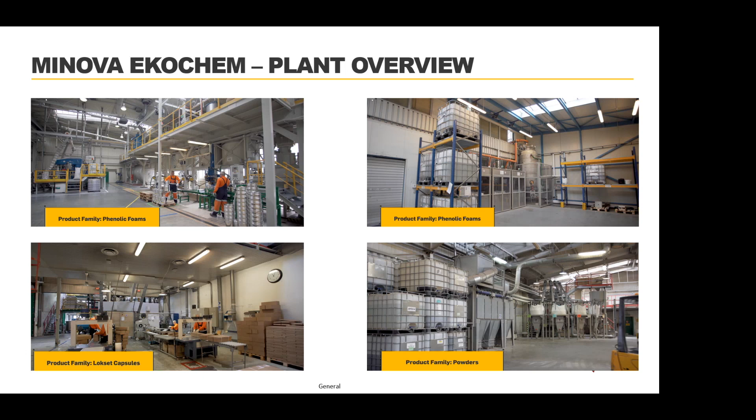Yeah, just another picture of the production plant there.

I'm not too sure where everyone is based. Are we all based in the southwest? West, are we? Yeah, and south, maybe Wales as well.

So Minova for the UK is based in Barnsley, where Jamie's from, and Nick's from that kind of area. I'm actually right down in Portsmouth, so I don't very often go to Barnsley, to be honest. But my job is to promote the sales. I do maybe go there 5-6 times a year, but I don't need to, because a lot of my work is all over the country anyway.

So we've got a brand new facility here, a really good facility, just off the M1. What junction? 36. Yeah. So it's very easy for any customers who want to visit site, or any customers that want to collect product, because you can collect it yourself, and also for our deliveries as well. It's good access.

There's no actual resin in that picture, but as well as keeping the resin in the warehouse, we also keep all the geotechnical products such as soil nails, micropiles. Again, we'll come on to that in just a few minutes.

Okay, this is really just a little history of how long we've been making things. So resin cartridges, which we use for rock bolting, we've been making those since about 1965. These are used to, has anyone used these at all? You've used those, great, okay. So you know how they operate. They're used often to put in either bolts in mining, or maybe soil nails on embankments for maybe motorways or rail embankments.

And then in 1971, we've been heavily involved in injection resins in Poland, and then quite recently, 2003, we've got more involved in the silicate resins as well. So there's a slide in a minute which explains what the different resins do and what they can be used for.

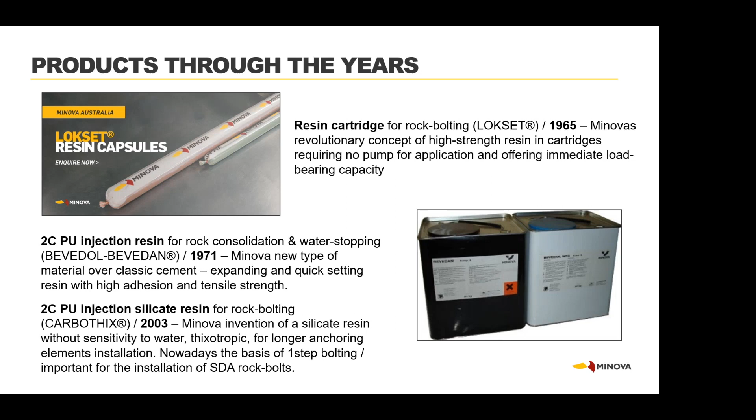When you say roads, is that with paving? Yeah, with concrete roads, the concrete slabs. I've got a case study which I'll show you in a minute. But yes, the resin can be used to actually stabilise the concrete slabs on motorways. You can also work on flexible tarmac roads as well. It's done differently and then you have to resurface afterwards generally. But yeah, I've got some case studies so we can show you details on that afterwards.

So the range of resins we manufacture: silicates, polyurethane injection resins, gels, cements and phenolics, and also the product we call Lokset. And on the next slide, if you went onto our website, which would be nice if any of you get a chance to do this, you'll see there's the whole range of resins on there, probably well over 100 different resins. But we try and keep in the UK market down to about 20 or so, since there's not too many out there, and some are very similar.

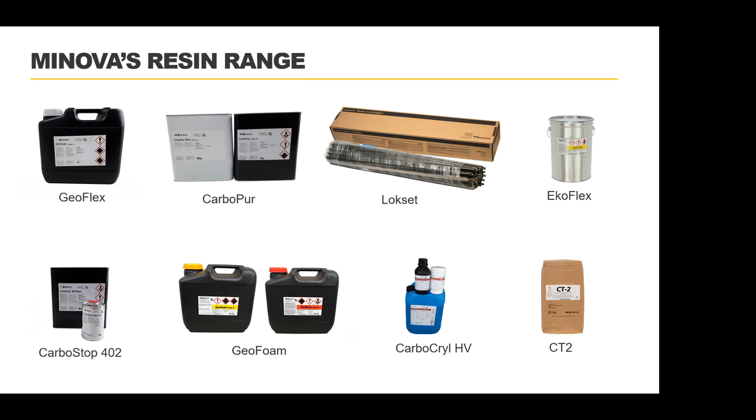After the presentation, we've got all the TDSs and data sheets on these, so we can discuss any of these for you.

Just a few shots of things we'd always be interested in getting involved in. Some of these are probably a bit too extreme, but certainly things like sinkholes - we can get involved in these, and we've got products that we can work with the contractor to actually fill the sinkholes.

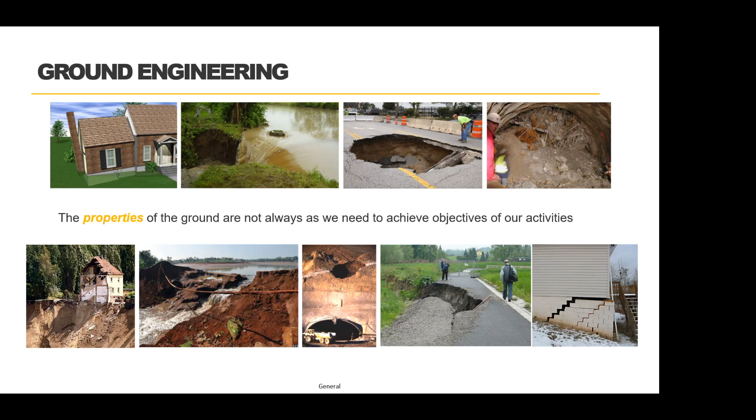For ground stabilisation, people like Mainmark will speak to you about this later, but when you've got cracks in walls, you can do an injection pattern around the outside of the property, inject to a certain depth depending on the ground reports, and the idea is to close the crack up and lift up. You're offering a guarantee normally, David, on your ones? Yeah, David will talk about that in more detail as a contractor in a minute.

This is a sprayable membrane that we use to stop - it's used really to stop rockfall, and anything loose being completely sealed in there. We're using quite a lot on a mine in Whitby.

What's that new one? Potash. Potash mine. We're using quite a lot of this there at the moment. Am I just pressing this? Sorry, Jamie. Oh, sorry.

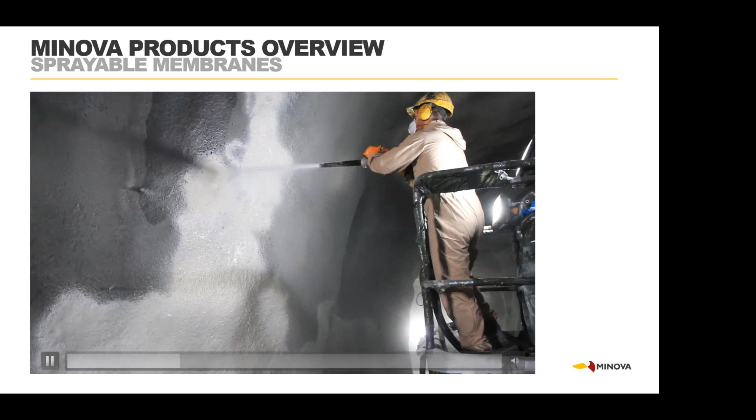Yeah, so potash mine - I don't know if you've heard of that. That's the one going from Whitby right across up to Teesside, which is where this is being used at the moment, and it was specified by the mining teams there because it's used a lot by Minova in America, so we're quite pleased to get that into the scheme. As you can see, it's a nice fast process.

You can cover large areas in a short space of time. By this slide, this product here is a resin - this is done under test conditions, but it'll give you an idea what happens when you do the same work on a concrete slab on a road or even in a warehouse, if there's water contained underneath the ground. This particular resin doesn't react at all with the water. So as it's pumped in...

As you can see, the resin's being pumped in, and what it's doing is migrating in and actually pushing the water out. So if this was on, for example, a motorway under a concrete slab, we'd have very small holes drilled into the ground. The resin would go in, the water would come out of the spare holes, so we'd know the water had been all pushed out, and then the remaining resin would set underneath the road, knowing it was water free. So you then get a steady, stable slab.

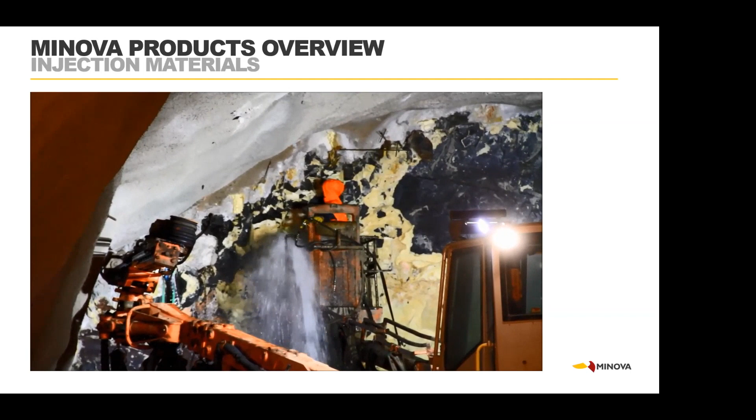Okay, so it looks like someone's just turned that off, but that's the process of constantly pumping the resin there and reacting with the water. It could be a long process. Any idea how long that would be, Nick? That one's a couple of hours, pumping in the same place.

This was a big project, but it can be used quite easily where you've got, as I said earlier, basement problems, sinkhole problems, lift shafts, things like that, where you've got water problems.

One of the main projects we've got done recently was the M180, a concrete road. It's one of the main roads between Hull and Scunthorpe. This was directly for National Highways.

This is one of the longest stretches of concrete road that's been injected with resin over the years. The beauty of using resin within road maintenance is what they call life extension work. This road hadn't had any repairs or any major works done on it for about 30 years. So there were two options: either take up the slabs and replace them, or come up with an alternative method. So here resin was injected.

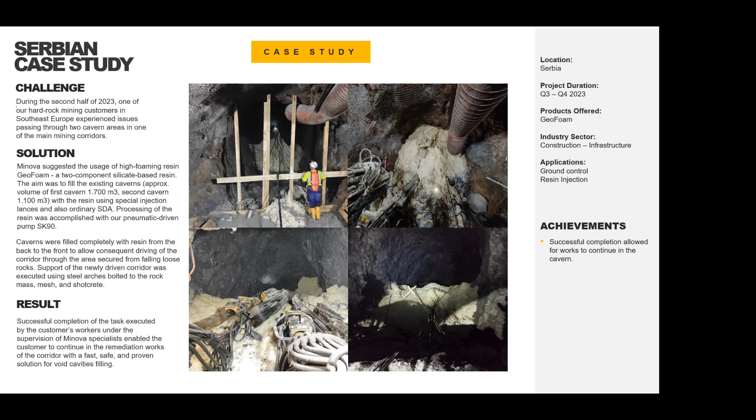Is there a strength to that? There is a strength, but there isn't - there's minimal strength, to be honest, and it depends on how we can change the strength depending on the actual foaming factor. But the idea of this, we've certainly got resins which have got lots of strength. If you need a particular strength, you tell us what you want, and we can find the resin. But this particular one is purely mainly for void filling, where you don't need strength.

What benefit does that bring then? What is the idea in the void being filled? Well, there was rock - I wasn't actually involved in the project, but from what I understand, the major project problem was there was constant rock falling, which was affecting things. I mean, they were filling out that void, but obviously they weren't using that void afterwards. So yeah, there is a question there about what they were doing for the long term.

But initially they needed it filled because of the amount of rock falling. So I would need to find out a bit more about it for you, which I can do.

It's probably easier with that method, because it expands as well. Yeah, that's right. It was a big, very large project. That gives you an idea of the height there, and that's being filled with a resin.

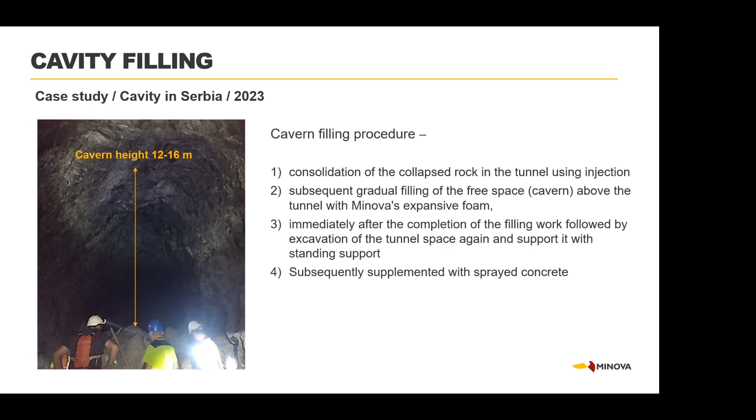It's quite unique actually. Reading your thing there, you've excavated through with this material - you can then excavate through it to put a personnel tunnel or something through, after they've done the actual work. It's because it's brittle at the end of the day. It's not like - I can show you resins, we've got samples in our cars that are solid, rock hard. But this would just be crumbly, so yeah, you can excavate through it.

Is it environmentally inert once it's cured? Does it give off anything? Is there runoff? No, it is inert once it's all cured. All of our products have got full data sheets. There's only one product, used years ago in the mining industry, which we don't really use in this country, and certainly wouldn't use within the construction industry, but everything else can be dug up if necessary. We've got all the safety data as well, which we can provide you. But the idea of that slide really was just to show you the mass volume of product.

Nick's used this on the shafts, haven't you? So for the shafts, yeah, I think from memory you did about 60 cubic meters recently. Well, the 18 meter one - 18 meters depth, 3 meters wide, 4 hours to build. So you can see how quick it is.

And is that done with two part mixers? Yeah, it's two part. Each mix - when it reacts, as soon as it's mixed, it reacts. How do you place that, with a pump or some type of injection pump? The geofoam into the shafts? Yeah, it comes down two separate hoses and then mixes on reception. Pressure holes, is it? Pressure, yeah, pressure.

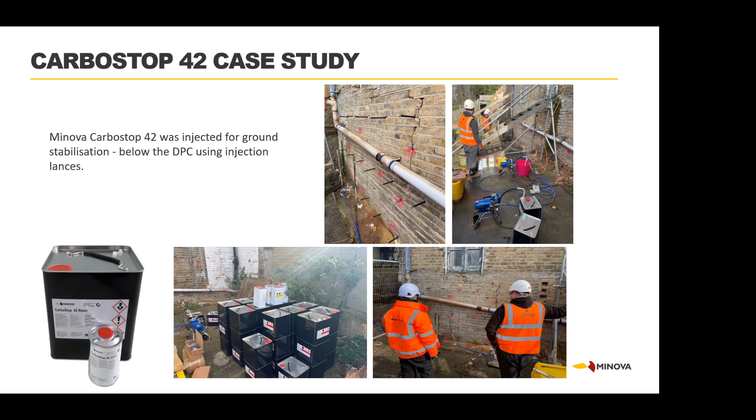I'm getting close to the end of the presentation now, but I'm just briefly going to touch on the geotechnical part of Minova. Like I said earlier, it's not part of the company I'm involved in, but I'm just going to show you a few slides of things that you may be interested in. If you are, then I can get our geotechnical manager to make contact with you.

We get involved in projects such as mesh walls. Some of the products are manufactured, but what we do also as a company, we're known as a one-stop shop. So contractors like Bam Ritchie's and Keller will buy all the products they need off us rather than going around to lots of different companies. So mesh, nails, etc.

Lokset resins, these are held in stock in our Barnsley head office warehouse. These can be quite easily taken out to site, either in large volumes or in small amounts.

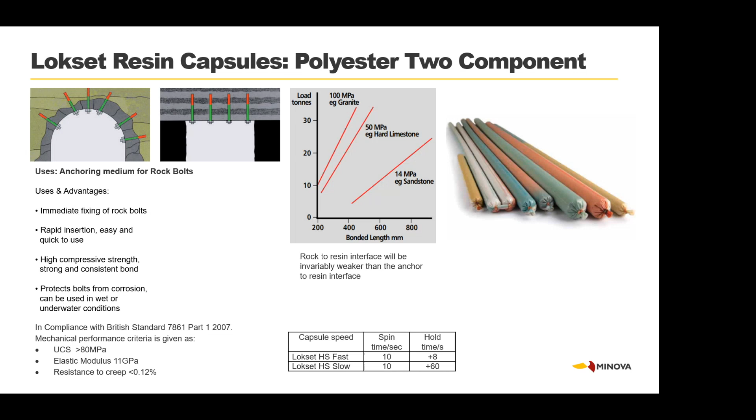I did actually go to this job briefly with our geotechnical manager, and this was a project where we'd supplied down near Hastings. We'd supplied all the actual mesh, all the nails, but not the labour. This was a Bam Ritchie site.

Again, more of the same netting, bolts. But you can see the kind of large projects that we certainly get involved with. And again, there's full technical support on this. There's also design as well - there's a team that helps with the design of these schemes.

Do you provide that design? Within Minova, there's some of the design. Yeah, we either do the design or we will put you in contact with our designers.

This is, I think, nearly my final slide. So we've been involved in some sections of HS2, as you can see there on the Chiltern Tunnel. This was all supplied, all the actual nails, all the mesh was supplied by Minova on this section. We were involved with Euston as well, but that stopped at the moment. But certainly a lot of money was spent on that, buying bits and pieces. We're still looking at a service tunnel at Northolt at the moment for HS2 as well. So we're still involved, even though the scheme's changing.

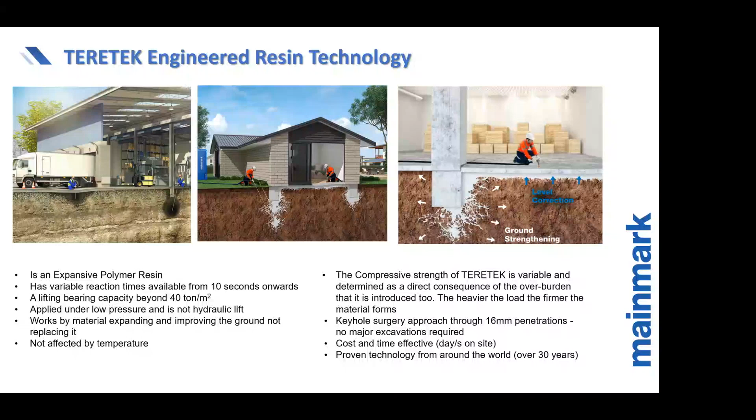Do you do the GI? We don't have in-house capability for that, but we can sub it out. A lot of jobs it's already done for us and we're provided with it. More applicable to the residential sector, we do 10-year insurance-backed guarantees and certificates of structural adequacy, signing off the job so a new purchaser of the property could get a mortgage and insurance.

So what do we actually use Teretek for? First, stabilisation and re-levelling, generally for ground-bearing concrete slabs. This could be a residential slab in a property, a vast area of concrete slab in a warehouse, or a concrete slab on an A road or taxiway in an airport.

We then have ground improvement, where we're injecting resin at depth underneath an existing foundation. This could be to remediate subsidence or for refurbishment works facilitating a load increase. We improve the ground to take the load.

We can also use these resins for void filling. We've got our Terefil product, which is foam concrete, and we've also got access to Minova products if needed. It depends on the nature and size of the void, and economies of scale, as to which is best in terms of pricing. But yes, we can do void filling as well.

Just to give an example of what it looks like when we mobilise a site - what do we actually turn up in? This is one of our rigs, a 10-ton rig, a self-contained vehicle. All the material, plant and equipment is contained within that, and effectively we just need to get this within about 75 metres of where we're working.

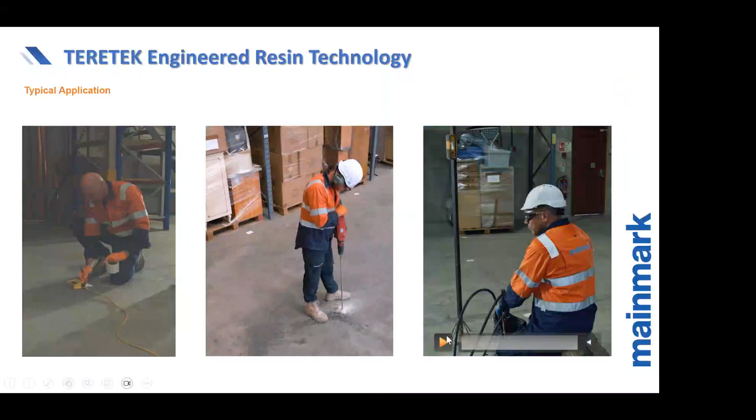I'll run you through how we deliver slab stabilisation and re-levelling. This example is a ground-bearing floor slab in a warehouse, a job done a couple of years ago up in Burnley. It's a commercial warehouse and the floor slab has dropped. There's racking off the floor slab, and where the slab's dropped the racking's uneven, so if you imagine forklifts trying to pick pallets off, it's a bit of a problem.

The traditional solution would be reconstruction, a new piled slab, something like that, but that's vastly intrusive, going to take a long time, and expensive as well. So this is really where the benefit of the resin injection system comes in.

The reason the floor slab dropped is the poor ground underlying the slab. It's consolidated, which has allowed a void to form underneath, so the slab isn't adequately supported and has therefore dropped.

Effectively what we do is take a level survey - on some projects this might be provided to us, but we'll come out and do it. We take a datum point and establish all the levels across the entire area relative to that datum, working out the required amount of lift. If we know precisely how much the slab has dropped, we very accurately know how much resin is required to undertake a certain amount of lift, which enables us to provide a fairly fixed quote.

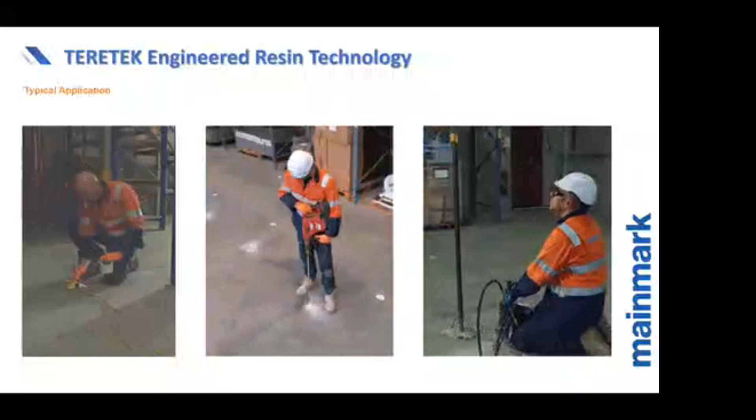We're going to drill a series of 16mm diameter holes through the floor slab, drilled in a grid pattern at 1.5 metre centres across the entire area of slab to receive treatment. Once we've drilled all of these injection points, we then insert an aluminium injection tube through each of the holes.

And remember, this is on a grid at 1.5 metre centres. We've got our rig parked within 75 metres of the working area. We've got an injection hose running from the rig, and at the end of the injection hose is an injection gun. We attach that to the aluminium tube.

Before we pull the trigger and start injecting, we'll mount the laser receiver onto a staff, which is accurate to 0.5 mil, and there'll just be a rotary laser sending a signal to the receiver. Press 0, we know how much we want to lift this point. Pull the trigger on the gun, and the resin is going to be delivered into the ground underlying the slab. Initially, the resin will fill any voids that may be present.

Within a few seconds, the resin is going to expand, and as it does so, it's going to compact and consolidate the existing subbase or fill material present beneath the slab. There'll come a point where the resin has filled any voids, it's compacted the underlying ground as much as it can, but because it's still expanding at that point, it can only then start pushing upwards, and as soon as that happens, the laser receiver will flick up between 0 and 0.5 mil of lift. So once we get that flicker of lift, we know we've got support or stabilisation.

So if we're looking just to stabilise the slab in its existing position, we stop and we repeat the process at the next injection location, on this 1.5 metre grid.

However, if we're looking to lift the slab, once we get that flicker of lift, we know if we continue to inject, the only thing that's going to happen is lift. So we continue to inject, resin goes in, it expands, and it starts lifting the slab back up. We'll be monitoring that lift on the laser receiver as we bring the slab back up, and we just effectively repeat this process at each location.

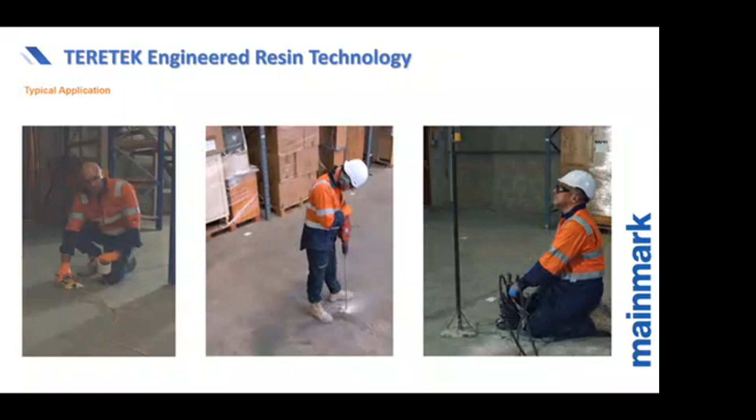But yeah, this methodology and approach would be very similar for any kind of concrete slab. This is obviously a warehouse, but it could be a concrete slab on an A road, motorway, or a taxiway at an airport. The benefit of it is minimal intrusion, very, very quick.

So in terms of from an operational perspective, what do we need to be aware of when we're on site undertaking these works? It's generally services and drainage. Probably more applicable in highways, but if there's a load of services present, obviously we're going to get the utility plans from the client or source them ourselves. But if there's a load of services, we'll get specialist companies to come in, do a survey, literally spray everything up for us, because as a standard we just do CAT scanning.

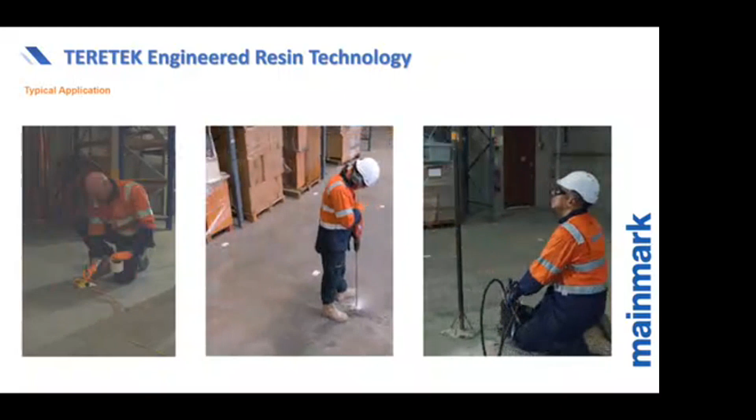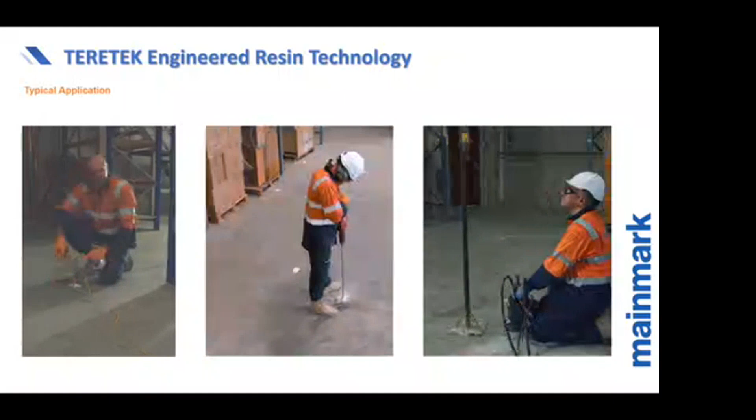And then for drainage, we'd recommend drainage surveys prior to the works being done to identify where they are, but also to identify if there's any pre-existing defects, because they should be repaired prior to the resin injection. And then, if we are injecting near any drains, we'll have drainage monitoring on site. They'll be monitoring the camera work whilst we're doing the works, just to ensure there's no resin ingress. If the resin does get in, we see it, stop injecting within 30 seconds before resin is cured within the pipe, and then we just jet it out to ensure the pipe's free flowing.

In terms of what we need from the client, what investigatory work do we need? Level survey, that's something we can do ourselves. I'd say cores are pretty important, so we know the slab thickness, and whether there's reinforcement there. Because if we need to lift a slab 200 mil and it's only 50 mil thick, we're going to crack that slab. So cores, and then it'd be nice to know if there's voiding present beneath the slab, and what the underlying ground conditions are.

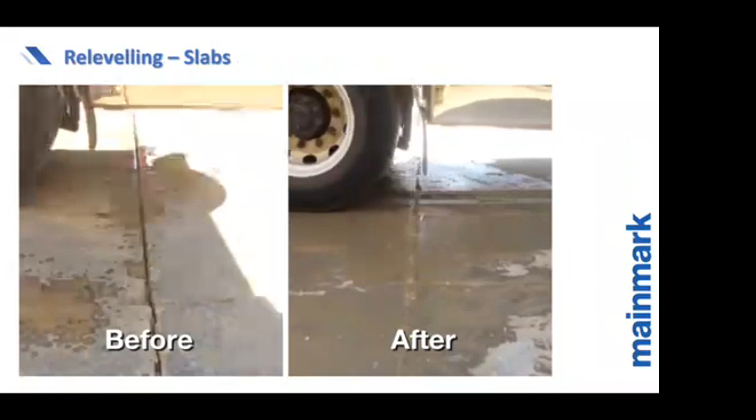So this is just a typical example of rocking concrete road slabs. You can see on the left-hand side, the vehicle's driving over the slab joint, and it's rocking. There's no doubt we've got water ingress on that joint, so that will need to be sealed as well.

But we've come in with resin injection, leveled and stabilized the slab, and it's very, very quick. The traditional solution there, unless you're just going to put something in to make it safe - but if you just do one drill out, it's an hour's work, very quick. I'd say a typical crew, which is one rig and 3 operatives, probably does about 300 square meters in a day in terms of area. But if you've got a vast area of road, we'll just have multiple rigs, multiple crews, just working to increase the output.

So that's kind of stabilization and releveling of slabs. Just to talk a bit about ground improvement now - a lot of the stuff we do is subsidence, so subsiding structures. We do a lot of residential insurance work, we do private residential works, but any building or structure that's subsided - bridges, roads - where you've got a requirement for undertaking ground improvement, improving the bearing capacity of the soil.

Generally with subsidence, the soil's been compromised by maybe defective drainage or clay shrinkage, resulting in a loss of bearing capacity. You've got a foundation built on top of that, and the soil can't take the weight. So the building or foundation drops, resulting in some form of underpinning, be it traditional underpinning or piling. Rather than that, we could utilise resin injection to provide ground improvement - inject the resin into the soil, improve the strength of the soil, essentially increase the bearing capacity of the soil to allow it to take the bearing pressure from the foundation.

So, subsidence, but then refurbishment works as well. I'll give you an example - you might have an existing concrete slab in a warehouse, and you're putting in a mezzanine floor on top, but the slab's not adequate. Well, at each of those column locations, rather than putting in a little concrete pad, we do resin injection to improve the ground to take the load. So that's the sort of projects we do.

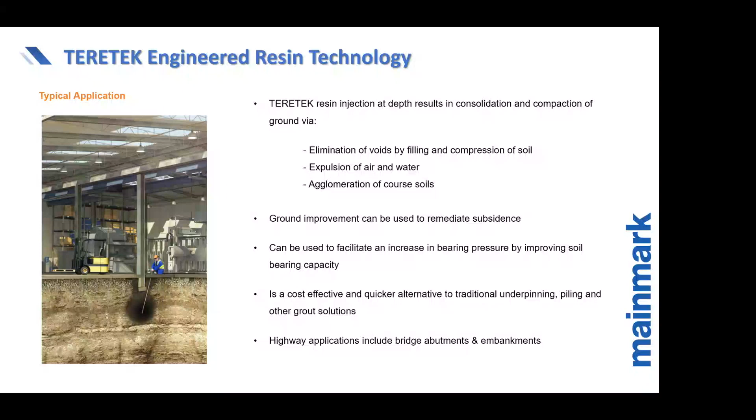So the benefit of what we do - self-contained vehicle, all the plant, material and equipment - we can literally pull it through the front door by hand and complete the works in a couple of days. So that's really on the residential side why the system's so beneficial.

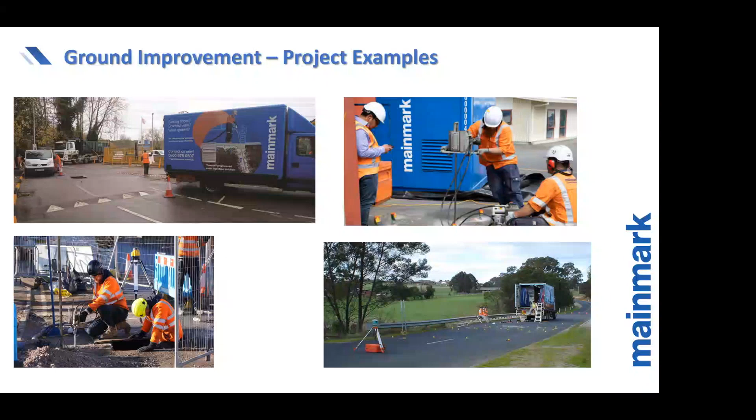Originally they were looking at putting a 1 metre deep concrete pad at each of these locations. First off, the cost was quite large, and also there was the timescale and disruption to the station. So what we ended up doing was injecting - it wasn't just all voiding, by the way, some places was loose, some was actual ground we were injecting into. At each location we basically drilled around the perimeter and through the centre and injected resin to stabilise the ground. Ultimately we just needed to give them 100 kPa in terms of load bearing. We did this job on night shifts, with maybe 3 or 4 crews, worked over consecutive nights, and had that job done in 4 working nights, basically with effectively zero disruption to the station.

Right, so that's Teretek resin. I'll just briefly talk about JOG now, a completely different solution, completely different product. This is a cementitious grout that we use for large-scale, complex level correction of subsided structures. So we can use the Teretek resin to lift up a porch, lift up the side of a conservatory, lift up a concrete slab. But if this whole hotel we're stood in had dropped 200 mil, that's where we'd use this system - effectively a cementitious grout.

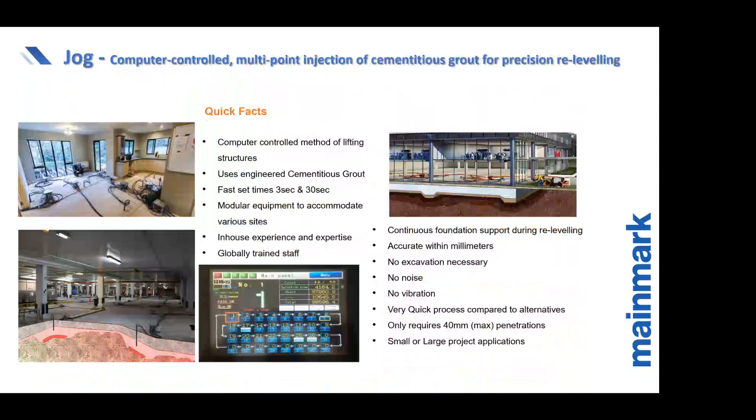So you can see it's pretty much instant, but it is that instant set that creates the layer, and then you continue to inject and you build up. Effectively it's cement and water, and what our technical manager calls a few herbs, which we're not allowed to be told what it is.

So this is injected at very high pressure, by the way. Those injectors literally need to be locked and tied into the foundation, because if they're not, there's a risk that they'll just blow out when you inject this stuff.

So we can amend the mix slightly to allow it to set over a longer period of time. The reason for that is once we start getting lift inherently between the injectors, you might end up creating voids where that cement hasn't travelled. So we then inject the longer curing cement, which will then permeate and fill voids up, basically. You just keep injecting that until you start getting pressure and lift, which kind of verifies the build.

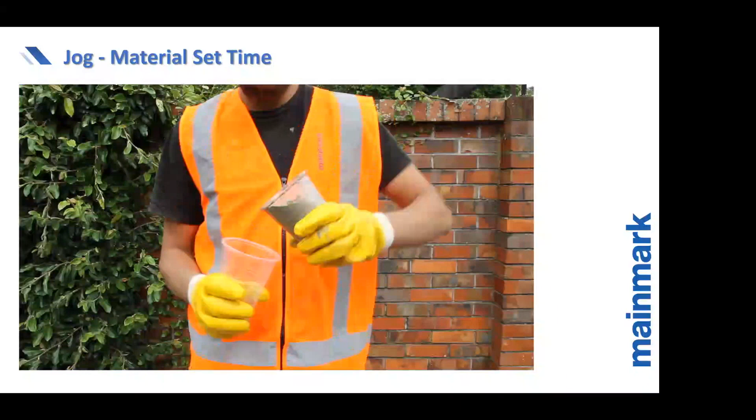I'll just talk to you about a job where we did this. This is in Barnet in North London. Just to make you aware, the company won a Construction News Specialist Award for this job last year. This job was done, I think, in 2021.

These two neighbouring residential blocks of flats aren't in line, but they're right next door to each other. They were built in the late 1990s. Prior to their construction, this land was just a load of elm trees, but the elm trees were felled and these residential blocks of flats were constructed.

A few years after construction of building A, it was noted that there were quite a lot of cracks appearing in the building. Insurers were notified, they did a period of monitoring, and it was determined that the building was actually suffering from heave. We've got London clay underneath associated with those elm trees that were removed. The ground is now recovering, pushing the building up out of the ground.

Anyway, long process. Eventually what they ended up doing was moving everybody out. They put in a new piled raft to effectively support and stabilise the structure. They completely stripped out the entire first floor, put a new level first floor in, because obviously the building's now out of level. If you did a brick course level survey here, that's still going to be out of level, but it's now stable.

Anyway, it took many months, vast expense. All the residents moved back in, and it was job done.

Anyway, it was then noticed that building B, right next door, also had a few cracks. Now, the cracks in building A are actually quite bad because the building just moved all over the place. But they noticed some cracks here that weren't too bad. They did a survey, and determined that building B had also suffered from heave, but the cracks weren't so obvious because the building had moved up fairly uniformly.

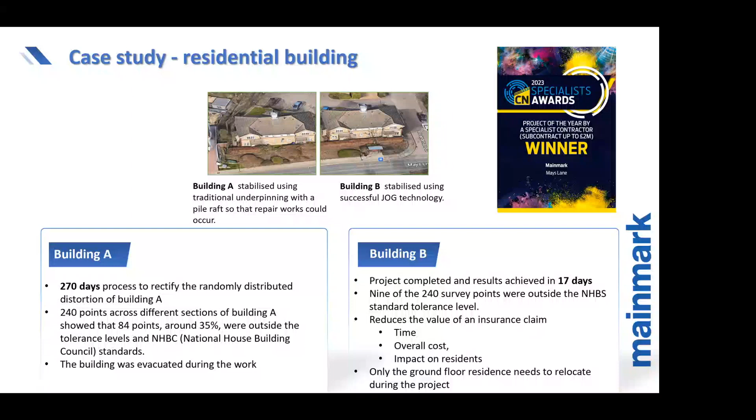And that pretty much brings us to the end. So yeah, residential, commercial, infrastructure sectors - all sorts of projects we get involved with.

We've done a little bit, to be fair. We have done a few new builds. We do a lot of insurance work, on the residential side, as well as private residential work, and then we do local authority housing as well.

They can range from like 3.5 grand up to a million, up to £1 million. Oh yeah, we would - so on the residential side, we might come out to do a porch, which is a day's work.

So the residential stuff is what we call our gap jobs. We've got big jobs that we could be on for months, and then we'll have gap jobs, the kind of 1-2 day jobs which fill stuff in between, really.

So really I only spoke about Teretek today and a little bit about JOG at the end, but we've got void fill materials, we do this permeation grouting. This is a fairly new one now, what we're doing, but just bear that in mind. If you need to excavate for some reason, we do jobs where we do a full-on temporary works design to ensure the ground will hold up for a period of time after we've injected it. So yeah, we do that as well.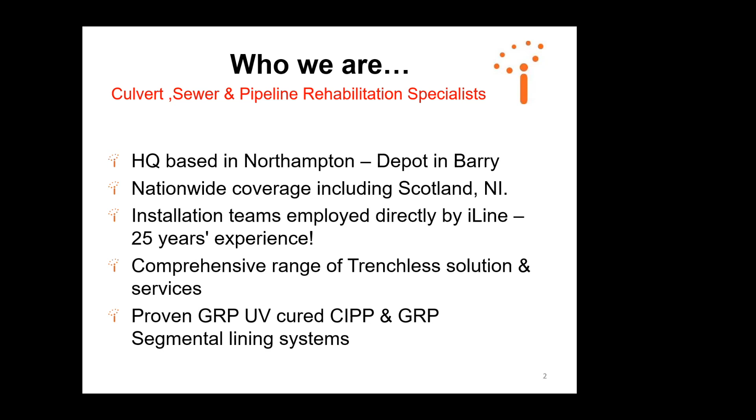The sort of things I'm going to talk to you about today: UV GRP cured-in-place liner, which is this material here for rehabilitating pipes, and then preformed GRP, which is this sort of material there. But hopefully we'll go through it quite quickly. Any questions, feel free to shout them out as we go along.

So what do we have problems with? Things like structural failure, developed through fractures, cracks, deformation. Obviously that goes into aging assets, and even faulty joints where maybe they're not being constructed correctly. And then ultimately you're going to get blockages, you're going to get collapse, and you're going to get issues above ground.

So that's the typical sort of thing, a little bit extreme, that we start to get involved in. People come on to us to talk about what can I do with this aging asset.

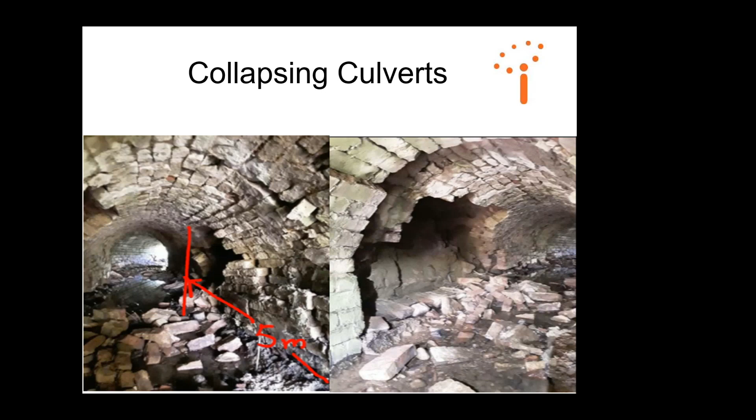This again is a culvert in, let's say, South Wales. I'm not sure where it is, could be under a railway, could be under a road. Obviously concrete pipe - a lot of the things we do are brick, stone culverts. We do quite a lot for Network Rail, so a lot of their assets are old brick culverts that were built however long ago railways were built, maybe 120 years ago. And these are the sort of things that we rehabilitate.

The types of pipes can be foul surface water sewers, combined sewers, culverts, which is where we tend to stick. And again, all sorts of shapes - unfortunately very few are nice and circular. We get all sorts of eggs, ovals, arch, rectangulars, all sorts of things. Anything from 150 millimetres all the way up to 7 metres in diameter. These are the sort of typical shapes and constructions.

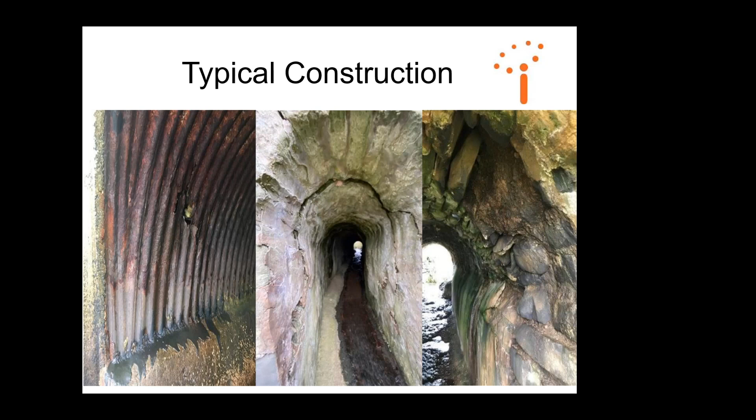Armco culvert on the left. Not sure what that is in the middle, but sort of brick and sprayed. Similar thing on the right-hand side. Weird and wonderful constructions that people have made over the years.

So how do we get involved from the start? We very much are one of these companies where we say to people, tell us what you've got, let us have a look at it. If it isn't right for us, we'd hopefully tell you at that point it's not the right way to do this - you're better off digging it out or some other method. Because I think all these solutions benefit from early contractor involvement, if we can have a look at it before we go too far down the route of suggesting something without knowing what we're doing.

So we offer a full design service - we will come and look at the jobs, we will design the jobs. What I mean by designing is people have different forms. Network Rail have, it's now A, B, C, Form Gs. You have the highway who have the AIPs, the approval in principles. We will do all of that. We will then select a rehabilitation method and design it. When I talk about design, I'm talking about taking loadings from things like LM1, LM2, Railway LM71, those sort of loads, and we come up with a package of design that says this is how it's going to work.

We'll also look at things like flow calculations, because that's critical. On most occasions you're having to obtain ordinary watercourse consent from the lead local flood authority, or if you're going down the main rivers you're going down the EA approval. All that we get involved in. And to facilitate that, we're going to do things like topographical surveys, ecology surveys, to put all that package together.

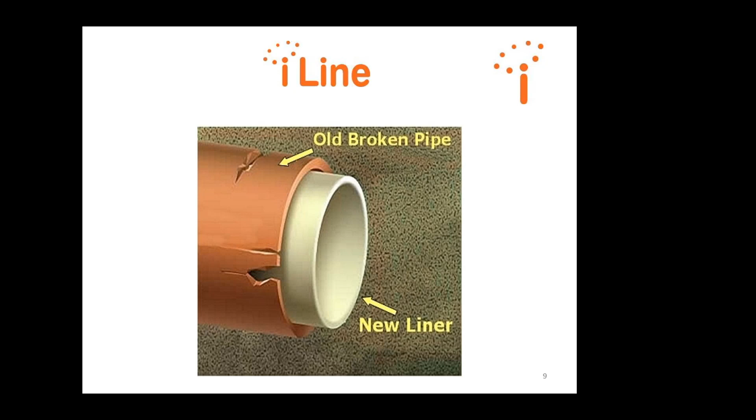So what determines the type of liner that we're going to use? What's the thickness? We vary this liner in thickness from anything from 3 millimeters all the way up to 30 millimeters, and that comes pretty much from your loading. Depending on what you're looking to achieve - are we just designing this liner to take the hydrostatic load? A lot of the water companies will look at just hydrostatic loading, because they will argue, rightly to a certain degree, that the pipe's still there - it's still circular, it's still standing up.

The issue we've got is leaking joints, so in a way all we need to do is protect the existing asset and stop this water coming in, which erodes the outside of the pipe and brings roots in. So all we need to do is design this liner to withstand the hydrostatic pressure, because the existing pipe is going to take the loads.

Some people call that a partially deteriorated design. Some people call it a WRC Type 2 design, which is the Water Research Centre. So we just got to establish what we're trying to achieve, and from then we take things like the live and dead loads.

For instance, Network Rail look at a fully structural liner, in effect ignoring what you've got there. So we take loads from the Euro codes, which in particular for railways would be LM71, for highways LM1, LM2, LM3, and we design that liner to take all that load.

Other things that affect us are ovality, the diameter, and the bends. Some lining systems are better at bends than others. This UV system is not a great lover of bends—certainly 45s and 90-degree bends it does not like and won't be efficient, so we have to look at a different system.

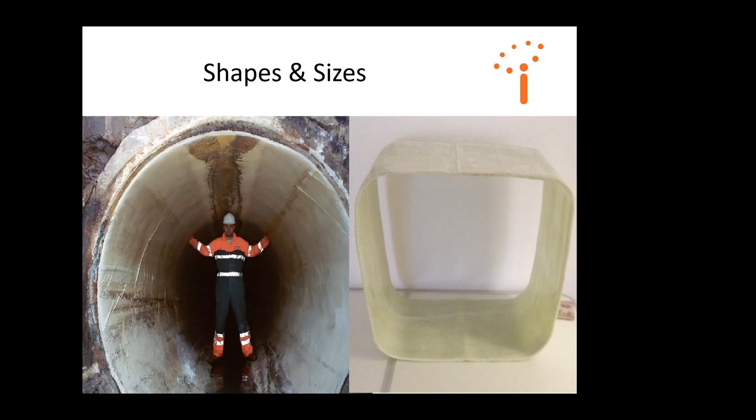They've wrapped it to get it to the thickness that I've told them I want, I want it 5 mil thick. So they'll wrap the 0.7 mil layers, maybe 7 times, until they get to that thickness. It just creates that illusion of a toilet roll in effect. So you see 0.7 mil thick, seamless construction because of the toilet roll effect. That's why this particular supplier went down this route, because they could get higher strengths.

This material, you'll see there's different colours on the back. This is a different supplier to this one. These guys just wrap it over, which is very strong, not as strong as this. We're talking minimal amounts, but it's not as strong.

So the resin is impregnated. Is that something that dries and only sets with UV light? Yeah, it is. So as long as, and again you'll see some pictures coming up...

Once that toilet roll's wrapped in the factory, and I've said to them, right, I want 30 meters, 900 diameter, 10 mil thick, they will wrap that up to get to the right sizes, and it will come to me in a box, like a pallet, folded over like that.

That sort of layer on the outside, that yellow one and that blue one, was basically protecting it from light. So if I took that liner out of this bag and laid it on here, it would cure under this light, it would cure under the sun. So as long as it's in the bag, it isn't going to cure.

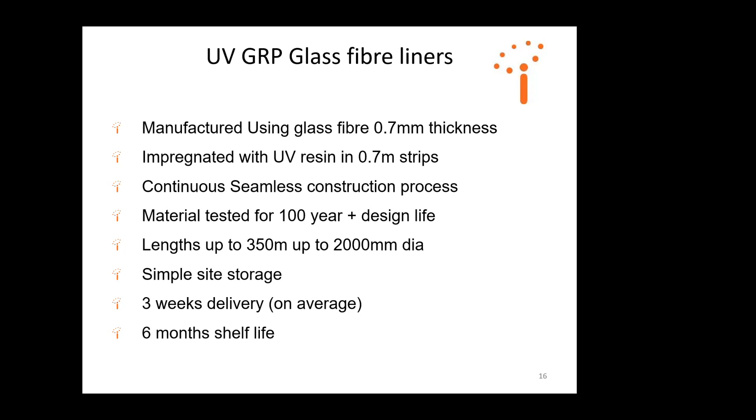And as I say, you can do anything up to 350 meters in one go, again that's a big job. Simple storage on site, as you'll see, and about a 3-week lead-in. That's the only thing, got a 3-week lead-in.

I'm going to probably flick over this because this is just really telling you what I've told you about the different layers, the outside layer being the bag, and then you've got a wear layer and things like that. But they come to site like this. So this is a typical liner, comes from Germany, it's got all the information on here.

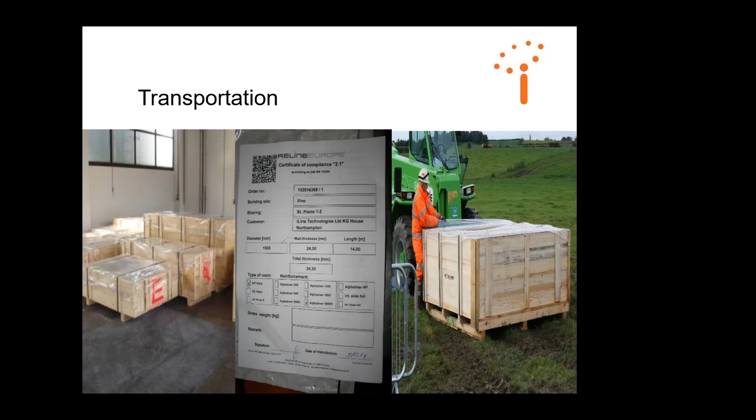St. Pierre, whatever that was, 24 mil thick, 1600 diameter, South Wales under a railway. You see on the left-hand side and right-hand side, it comes in a box. As long as we leave it in that box, we can leave it for 6 months. It's not going to do anything, it's not going to go off. It's as good as the day it was made.

Again, the great advantage with this is it's fully portable, so we can go across fields. As long as we can get the box there, we've got a compressor, and we've got a curing system. But as long as we can get there, we don't need a 20-ton wagon to get there. That's one of the beauties of it.

And again, non-disruptive. A lot of the work we do, we don't need any traffic management, we don't need any closures, we don't need the railway shutting in possessions. We work off the side of the road, off the side of the railway, whatever we're doing, and it minimises that downtime from that point of view.

So the way of installing these liners is we CCTV it, we camera it, we make sure we've got it right, the right diameters, because we like to do that ourselves. There's nothing worse - we've all done it - we turn up at site because somebody tells us it's a 450 or 500 diameter pipe, and it's not, it's a 250, and we've got a liner then that's no good to anybody. So we always like to do the investigation, check the diameters, check the lengths, make sure we've got the right information before we manufacture the liner.

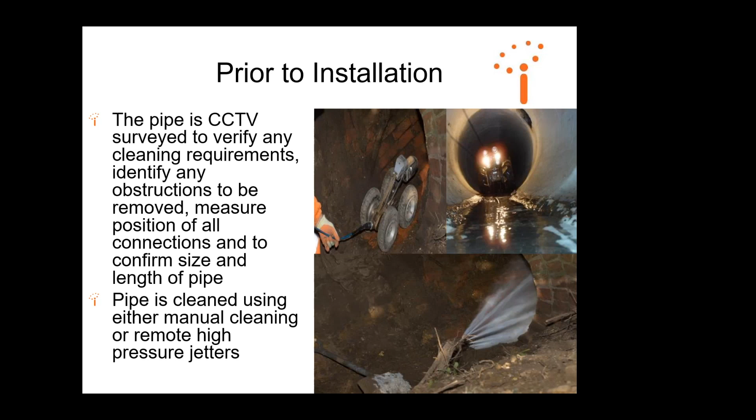Once we come to site, we obviously clean the pipe, the culvert, whatever it is. We then have to overpump the flows, so the system has to be dry - it's one of the slight downfalls from it, you have to have a dry system. So one of the issues you always get is how we're going to get rid of the water, especially if you're doing - we'll stick with culverts under railways because that's a really great example - how are we going to get rid of the water?

Well, we can't pump over the railway because the trains are running. The same when we're doing a culvert under a road from head wall to head wall, we can't pump over the road. So that's always the issue, whether that is putting ramps in or putting the overpumping hoses underneath the tracks, so between the sleepers is an example.

Or sometimes, I have to be honest, we close the road, especially for highways. We will go in and say, right, the system's very quick, we only need it closing for one day. Let's close the road on a night, and we'll put the liner in and we can pump straight over the road and there's no issues. Yes, we do build ramps and everything that goes with it, but it does need to be dry, and that's going to make a factor in a minute when I talk about other things.

How's it going? There's the liner in the bag. It's the same company as this one, but he's changed his colour of bag to silver for whatever reason. The plastic here is what we call a slip plane. We put that in first just to stop the liner getting snagged on any bolts. Because this is an Armco culvert, it just makes the sliding of the liner easily through.

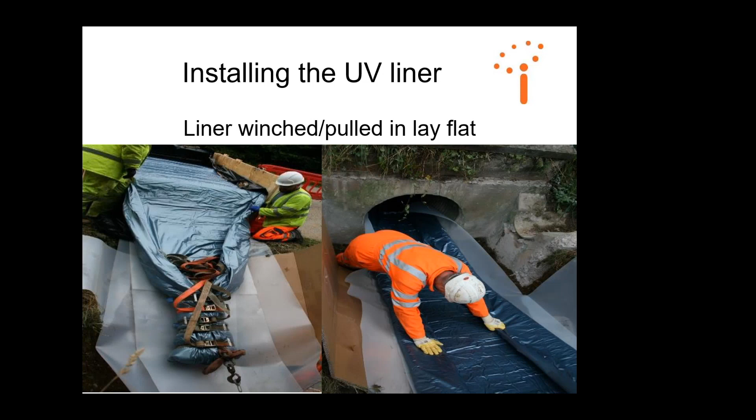So we're winching it into place. We need to get a winch at the other end. The other end, generally we have portable winches we can carry to places, so we can minimise what we need at the other end. And the other end doesn't matter whether it's upstream or downstream, you can go either way - whichever's got the best access to get the liner crate is the way we tend to go.

So this one here, we use a different type of what we call slip plane pre-liner. This pre-liner is the size of the liner that we want to go in there.

So I'm guessing, looking at the existing structure, it was probably 1,200 diameter, and we've put a metre diameter liner in. What we've done is got a foil bag and slipped the liner inside it, so when we inflate this liner it will push out to the bag and won't overinflate. It needs something to push against, because to get its strength the layers need to be compacted together. So we have this pre-liner, it pushes against it, compacts the layers, and we cure it, and then we grout the annulus. We did that because of the voids, so that when we grout we can fill them all in.

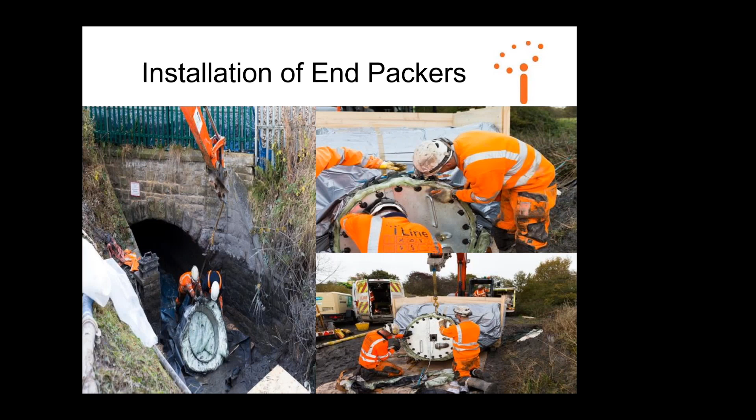So you can see what we do when we pull it in. We put what we call end cans, stop ends, or end packers sometimes. We open the liner out at each end, put these packers on, and then inflate it with compressed air, only going up to about half a bar. It depends on the diameter, the size, the wall thickness, the amount of pressure we put in, but generally about half a bar of pressure.

That inflates it out. The idea is, on a traditional liner, it goes tight against the host pipe. Where we're doing an irregular shape, it might go tight against this pre-liner we've put in to stop it over expanding. We then install our light train, because the resin in this material is light reacting. So as I said before, once it's in the bag, it's not going to go off, but we're curing it by light, ultraviolet light. We call it a light train - it's a series of light bulbs, for want of a better expression.

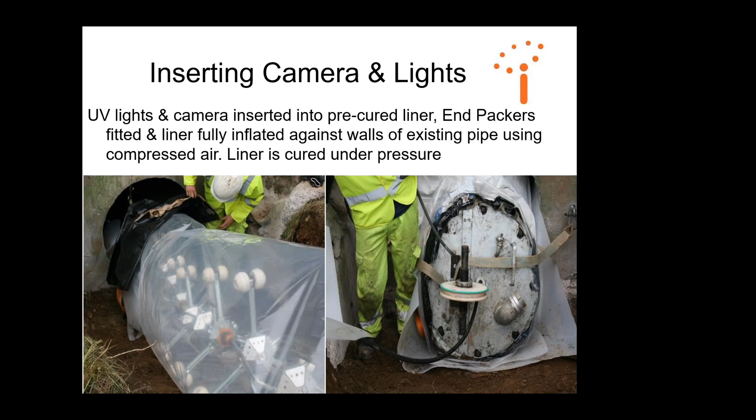One of the great beauties, from a contractor's point of view, is once the light train goes in, we have a camera on the front and we camera the system before we cure it, to make sure we've got it inflated correctly. Years ago, what we used to call the boil-in-the-bag systems were inverted in with hot water, and the problem was you didn't know what you'd got until you cut the ends off and got the water out. Then when you cameraed it, you'd find you'd twisted it or got it wrong, and you were scuppered with it. It was a nightmare - I'm going back to when we used to do the old ones 20 years ago.

The great thing with this is if I pull the camera through and for whatever reason we've twisted it or made a mess of it, you can take the air out and pull the liner out, and you haven't damaged the asset. You've damaged your liner, and that's rubbish, but at least you can come back and go, right, we'll get a new liner and come back and do it correctly. So it gives us a couple of safe stop points to check.

Once we're happy, we turn the lights on and pull the lights back at a controlled rate per minute - that's all done by a curing system. One of the early photographs showed a big steel box in the corner - that's the curing system. We tell the curing system what size lights we've got on the light train, though it knows anyway because of how it's all programmed.

What's the diameter, what's the thickness? You'll see on one of the photographs a box with a piece of paper on it, with a QR code. We scan the QR code into the machine, and it automatically knows it's 1,200 diameter, 10 mil thick, and it's got 4 times 4,000 watts. It tells me I need to cure it at a metre a minute or whatever. So it's all very controlled, and that's the other great thing about it.

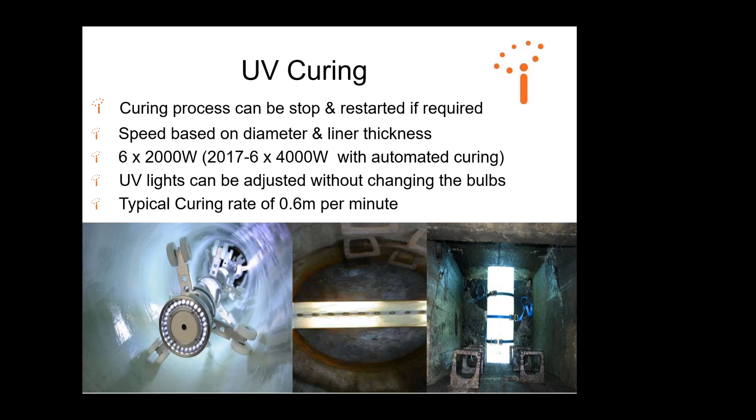We know once it's done it's cured correctly. Generally the rate of curing is about 0.6 metre a minute - it's a slow walk over it. So coming back to the road closure overnight, if it's a 30, 40 metre culvert, we've got it in the evening, done in one shift - done and dusted. Once we've got it all the way through, we trim it up at each end.

Obviously, the picture on the left-hand side, we've done a slightly smaller line than the host structure for whatever reason - I do know where it was, that's up in Doncaster somewhere. Again, Network Rail.

And then we pull out what we call the inner foil. If we didn't have this inner foil inside in its uncured state, once we inflate it with air, the air would just pass through the liner. So we have to have something that retains the air inside whilst we cure it. This inner foil is see-through because the light allows it to penetrate through. We just unpeel that and pull it out, a bit like cling film, and then your line is finished.

Final survey - if we've got any laterals and it's a small diameter, we'll go in and re-open these laterals with a robotic cutter. For a larger liner, we'd go in man entry. If it was sort of 1200, 1300, 1500, we go in and cut those out.

Where we've done a smaller liner, we will then grout the annulus, so you see a bit of grouting up there. The grouting is generally a G3, general purpose, 12 Newton grout. All we're looking to do is take the loads from the soil or the structure above onto the liner. The liner is taking all the loads - it's just a transfer from that point of view.

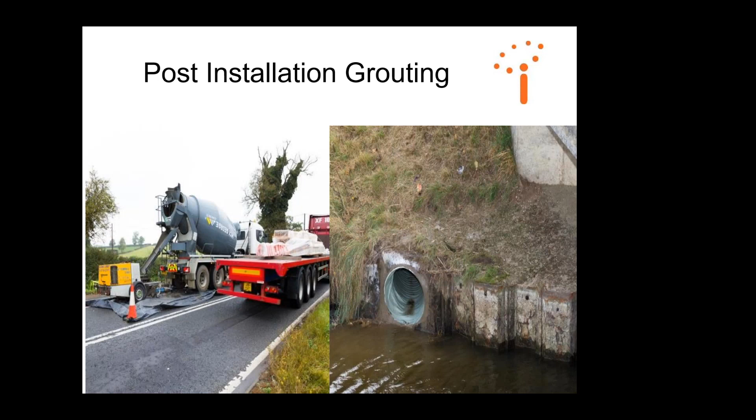The next few photographs are very much before and after - exactly the same job again. Typical of what we do with the old Armco culverts, the inverts going, we put a liner in. You can see a little bit of deformation in the host structure, which we've lined over, and that's something we would take into account when we did the structural design. We're missing bricks here as well.

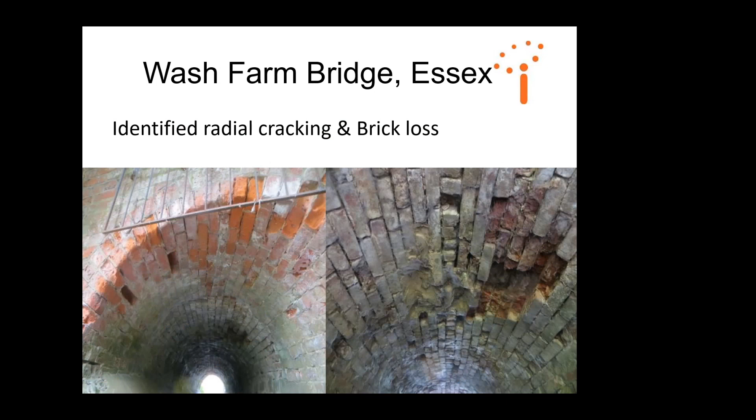Wash Farm - I think this is on here because this is probably one of, well it is, the thickest liner they've ever done in the world at 30 mil thick. The loads were very, very high on this because of the access to an industrial park and one thing and another, so we had a very thick liner. But you can see here, slightly smaller, we've grouted at the back to fill those areas where there was missing brickwork and things like that.

And then we talk about big diameters - 1800 in Lisburn, in Belfast at 21 mil thick, a good thick heavy liner. We've got end caps on, as I said before, and we have to put stoppers in to inflate it with air. The way they're generally secured is we put a ratchet strap around the liner and clamp them in.

But of course when you've got an 1800 diameter, you've got a lot of end pressure there with the air. So we had to look at temporary works and how we're going to stop those sort of blowing out, or if they did blow out, the risk of it.

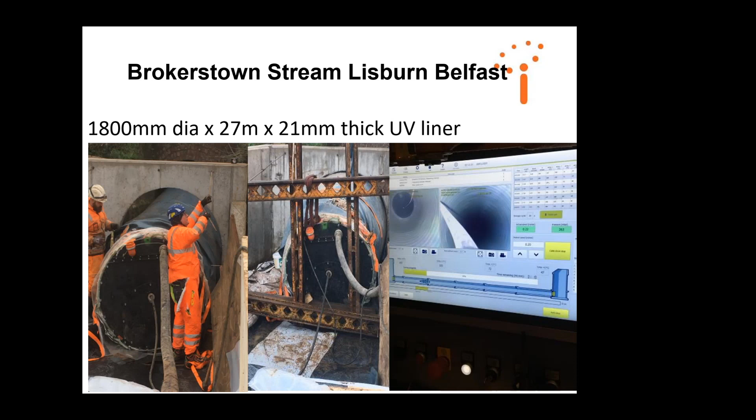We then extended it out 20 metres and designed that as a buried pipeline. The contractor then came around, backfilled around this with a typical gravel bed and surround, and then built his embankment on top of it.

So that's UV lining, that's cured-in-place lining, which again we've run through very, very quickly - as I said at the start, I'll make it quick for you. But it's all about looking at the job before you commit to it. Not one solution sorts everything out - we have to come and look at it. And as I say to people, we'll come and look at it.

If it's not right, we'll tell you it's not right, hopefully, because there's nothing worse than going down the route of even just getting to site and then realizing this isn't the right solution for the job. Better off knowing beforehand.

The other thing I want to talk about is a similar sort of system, but these are pre-formed GRPs. These come to site, a bit like this piece of G-form GRP material. We use these for the bigger diameters, bigger structures, and odd shapes where we can't put a UV liner in, because we can't reduce it down by putting a circle in, we can't design it for a non-circular shape since it's too much load, and we can't make it any thicker than 30 mil, whereas these we can make up to, well, indefinite really, but I've made them up to 70, 75 millimeters.

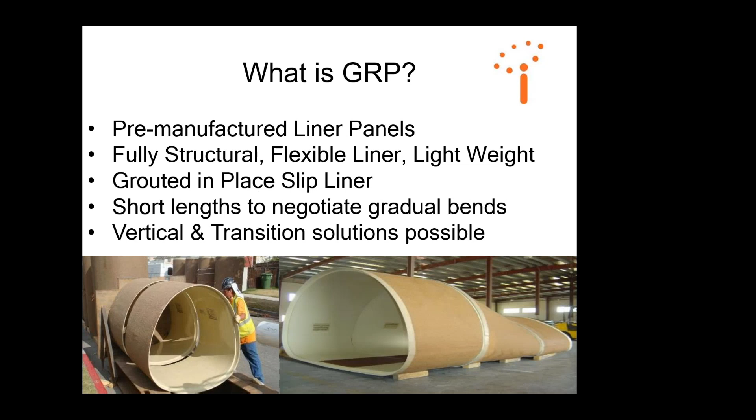Also where there's a flow issue, they're very good for flows. So what is it? Basically manufactured GRP panels, made in a factory, and we can make them to any shape, any orientation, as you'll see in a minute. We tend to use them for the larger diameter structures.

It also gives you options like mammal shelves. We can build mammal shelves into these, and you'll see a couple of pictures in a moment. We can put fish baffles in them, pre-build everything into this. So they're really good for that, and good for where we can't divert the flows.

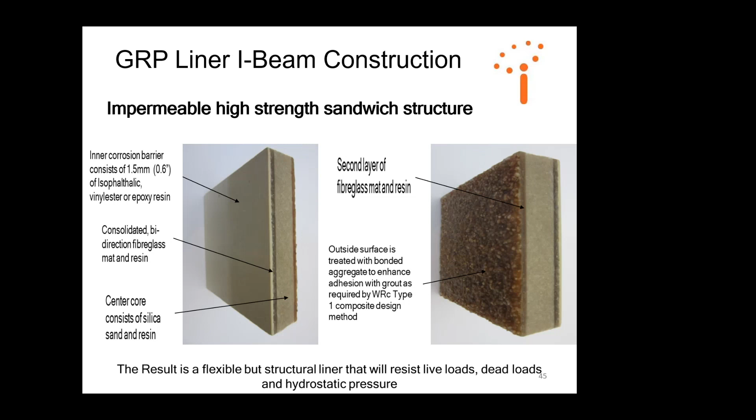So how are they made? They have an inner surface which is the anti-corrosion barrier. Then a middle section, which is where the strength comes from. And then the back layer, this part here, because these are going to be slip-lined into the host structure, and then the annulus is grouted, so we get a good shear bond between this structure and the grout.

The ecologists like them because they hold the silt. One of the problems you have is that they're too smooth, so the silt comes straight out, which the client likes because they don't have to clean them, but the ecologists don't like because you're losing the bug life and silts in there. Putting the anti-slip on gives the advantage of holding the silts, so they quite like that.

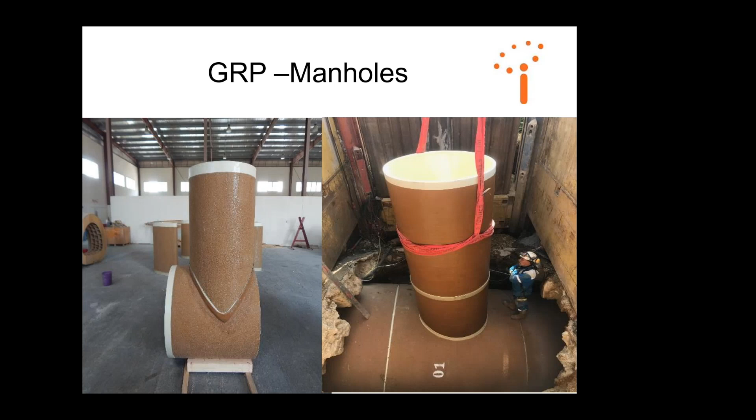So you're arguing between two different parties, and again different sizes and shapes that we do, things like manholes where we've gone through a particular culvert and then they want to put a manhole on top of it. We can do that in preformed GRPs, and these come manufactured overseas, so we have to ship them.

Generally they're shipped in 20-foot containers. We sometimes do them in multiple pieces, a top and a bottom, or three pieces, because of difficult access on site, or it's more cost effective to fit in a container. If you've got a 2.4 diameter pipe, as a circle, you're only going to get one in a container, or however many. If you break them in half, you can get 20 meters in that container, which reduces the shipping cost, and then we just assemble them on site.

We've just done a recent one, not in this presentation, again in Belfast, which was about 3.5 meters tall by 2 meters wide. It was a massive unit, so we got that in a top and bottom unit so we could build it on site, just to save on shipping, which made it a lot easier and a lot quicker from that point of view.

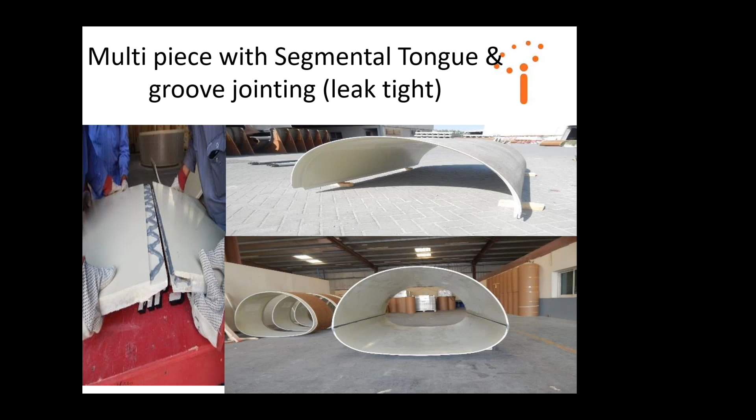They're joined by a fully structural adhesive, which in effect is a bit like welding, stronger than the host material, so there's no issue from a design point of view on that. And that's an example - you can get whatever, six in that one, or you can get many more depending on the configuration.

That's it - 6, 10 and 16 in the same container. So it shaves on the shipping costs because we are shipping these from a distance.

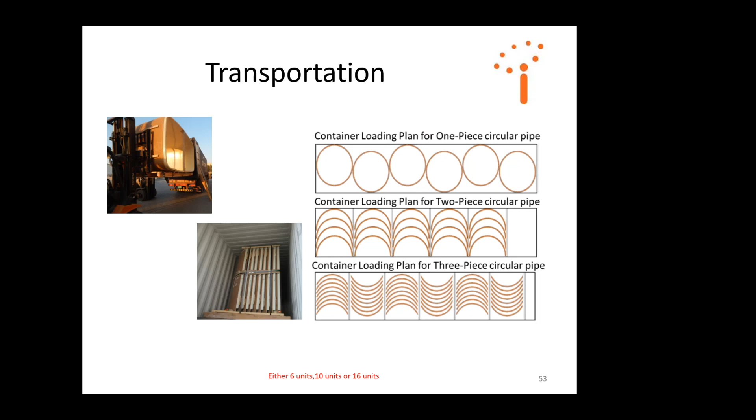One of these things is about the design and the measurements. We need to measure this ourselves, because I don't want anybody else measuring it - when it's the wrong size, we can't do anything with them. We've only ever had it go wrong once, and it was my fault because I measured it and we measured it wrong. Now I've still got these liners 7 years later, still in our yard. Every job I ever get, I'm looking for the same fit, and I know full well we're going to throw them away, then about a month later we'll get a job that fits them.

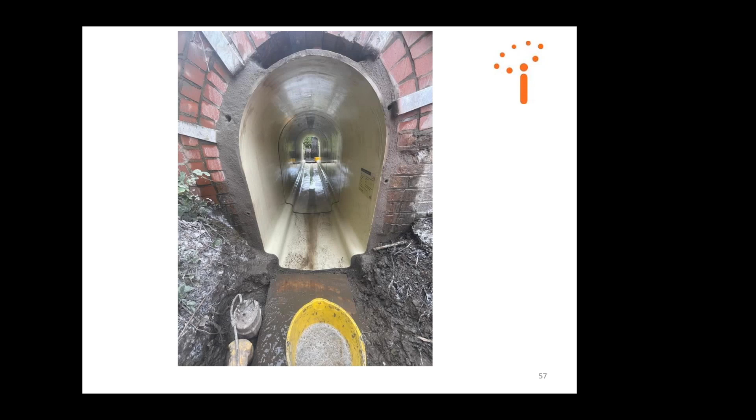Again, Norbury's culvert there, up in - how they're manufactured by hand, because everyone we tend to use is bespoke. It's very rare that we'll use a circular 1500 diameter pipe, because we tend to use the UV cured - it's quicker, this is a little bit slower installation. So they're all manufactured by hand in a factory, where extensive testing is done and everything is sampled and tested. So we have this 100-year design life that we can look at.

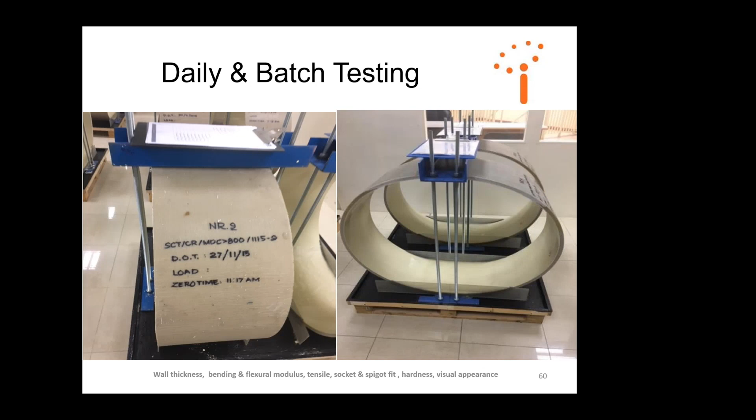So we installed them in the wet, and there's some better pictures coming up.

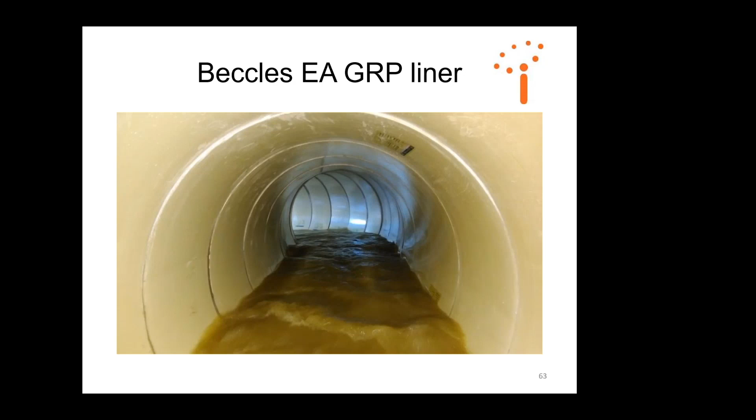Now, actually, this is how we do this, is it? Let me - I've got to press play. How do I press play on this, Jason?

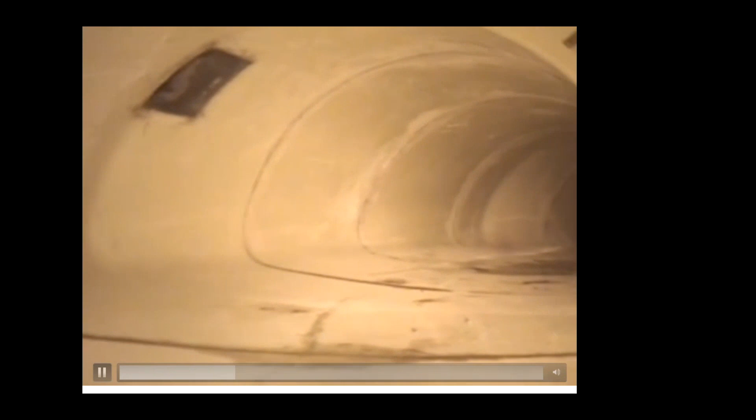So this gives you an example of an arch with a flat bottom with a GRP. This had numerous bends, as you'll see on this video - it'll go round. These are the lateral connections that we've re-pieced in. This was for Suffolk Highways, under the road there, and it went round, hopefully a little bit quicker - the lateral coming in.

I think the reason this video is on here is it just shows a good example of how we can accommodate bends in it. But also we had an issue here with the flooding models that were done - we needed to keep the existing capacity as it was. However, the culvert had been extended at some point, I think with 1,500 diameter concrete pipes, for the last 10 metres, but we had to keep this capacity for storage.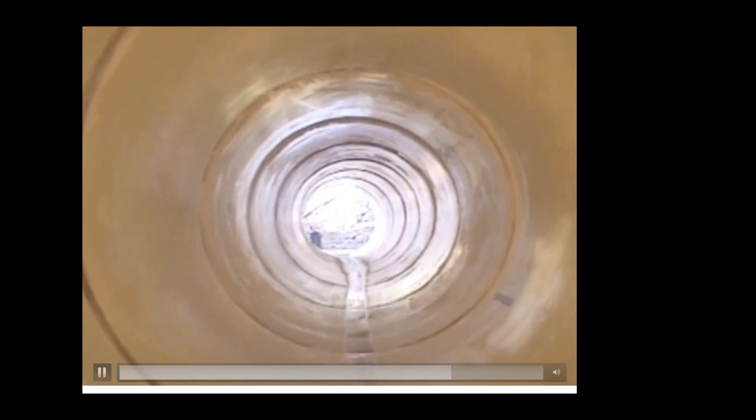So you can see this last unit is a transition piece that we've actually made. Then we've come down into standard circles and leveled that in. This gives you the flexibility to do any sort of shape, any orientation, and change it along its route.

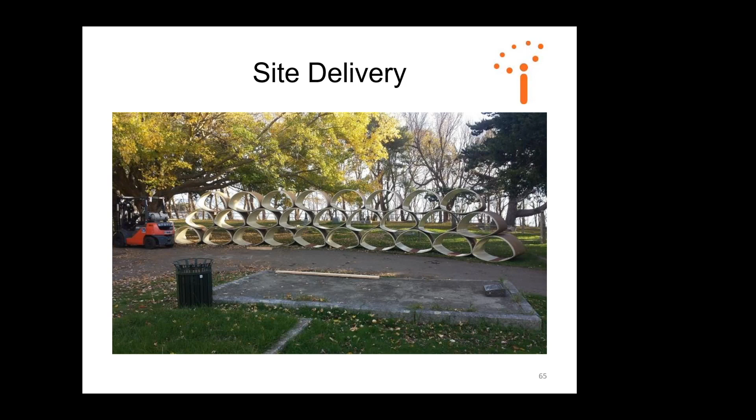But they come stacked on site, then they drop down into the culvert and we're literally pushing them in - so this is where we need the annulus. We have different lengths of units - a lot of the time we might have them 2.4 long, that's the longest we can make them with a joint.

We might have them at 600, or 1.2 metres. Again, it's the ease of access, lifting, carrying, manoeuvring these things into place. So just some big diameter, sort of 4.8 diameter liners that have been done there, and also this ability to have multi-section units.

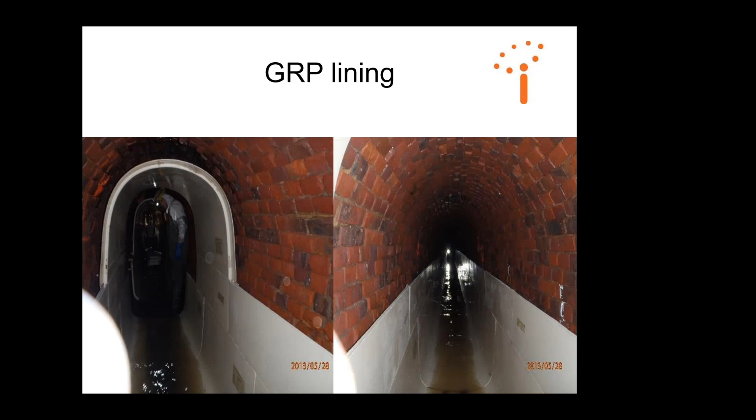This is a Thames Water job from many years ago. We made it up in panels and actually installed it inside, getting down through a manhole lid - a 600 by 600 cover - which saved digging a big shaft.

But these next photographs are a good typical example. This is up at RAF Valley in North Wales - a typical twin culvert going under the railway lines just by the RAF base. You can see the shape we've got. The guys are pushing them in, bringing them through, jointed with a spigot and socket joint.

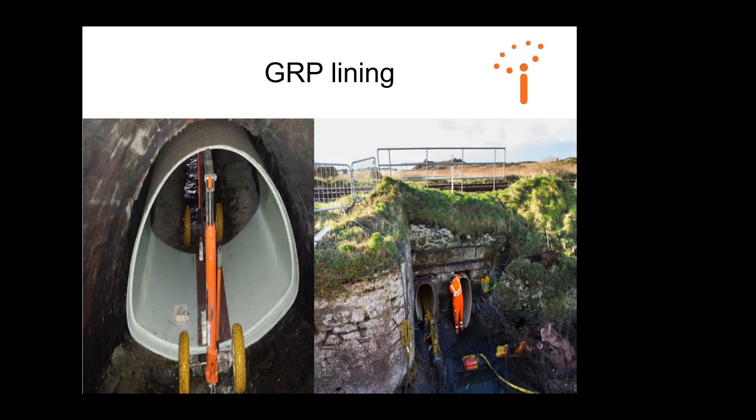We have different ways of moving them - by hand, or by a little trolley depending on the weight - to push them through. Once they're all in, we start the grouting. Again, all of that has been done during normal working hours with no disruption, no downtime.

This shows the typical grouting installation we use. We grout it in stages - we're not looking to put it under pressure, just looking to fill it. So it's a high flow, general purpose grout, and we tend to use cementitious material.

These next two slides show the overpumping. What we can do with the overpump - this is down in Surrey - we can put them in the wet. You see the guys on the left-hand photograph with the waders on, and in the middle you see them now installed. What we'd do is leave them maybe 6 or 7 inches apart.

We'd just get them into place, then set up overpumping and pump through the middle, and then do the final jointing. So we don't have to overpump further, or get the pumps over the railway or over the highway - it just saves on flow management and makes things a little bit easier.

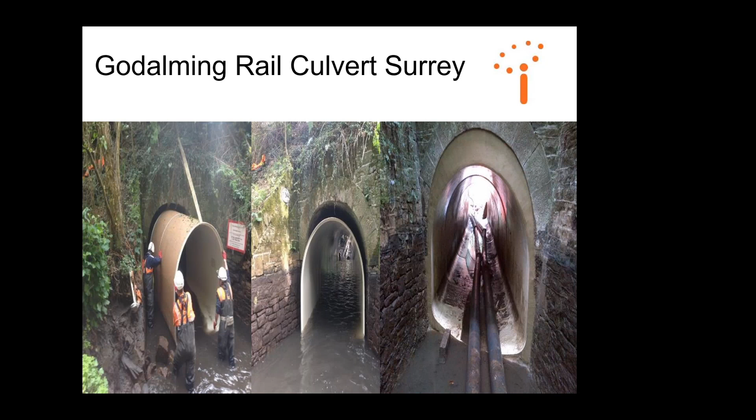And then, oh, we've got another video. I showed a picture of a job in Walsall where we had a little jigsaw puzzle. This is how we came up with the jigsaw puzzle.

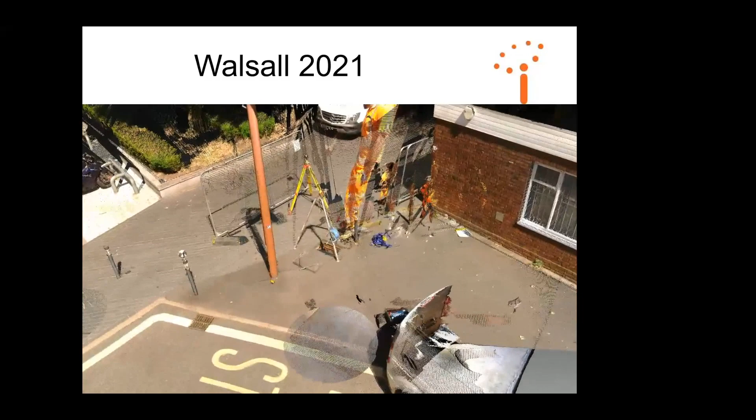Here we've done a point cloud survey. You can see how detailed the information they give us can get. We don't do them ourselves, unfortunately - we have a surveying partner who will come in and do this sort of thing.

It was a twin box that ran under a road that we were actually upgrading. They wanted to upgrade the road because it was turning into a bus turning area, and the existing precast planks didn't feel that they had the strength.

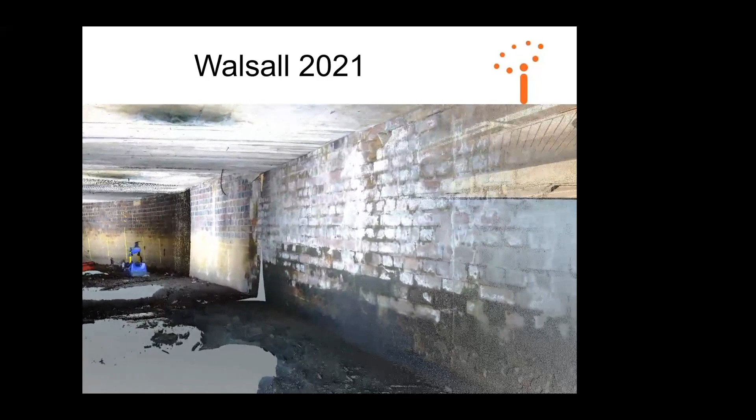So what we did here, we surveyed both tunnels, and that gave us the orientation and the layout of the units. You can see how detailed these surveys are and the information they give us. Again, we used GRP here because overpumping would have been a no-no, even though there isn't much flow in it.

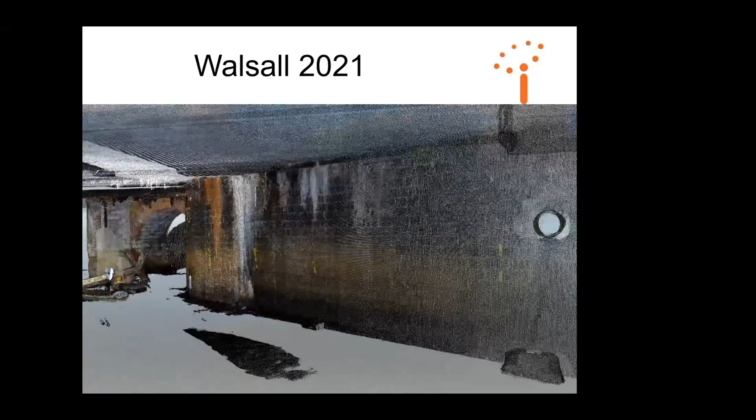That's just going under there - I think it pans round, but you get the impression of the detail. And that's the finished article. On the right hand side, that's just done, and there's the installation going ahead.

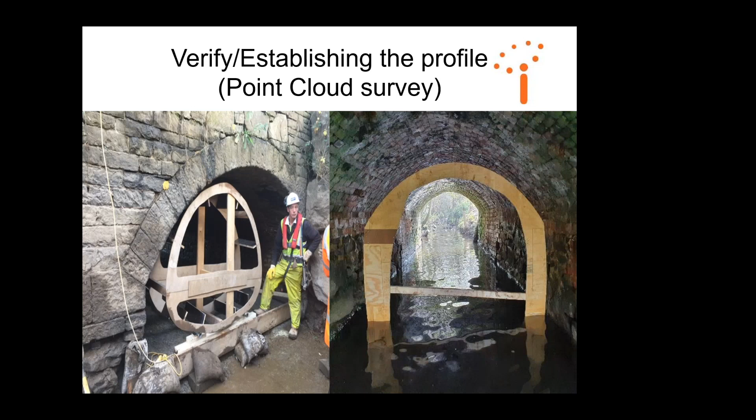We're building some temporary stop ends to do a bit of grouting before continuing with the next section. We talk about point cloud surveys, but I have to be honest - we do wonderful point cloud surveys, but I'd much rather go in with a piece of wood and a flipping measurement. At least then you know you're right at the end of the day. There's nothing worse than turning up and it's all your fault.

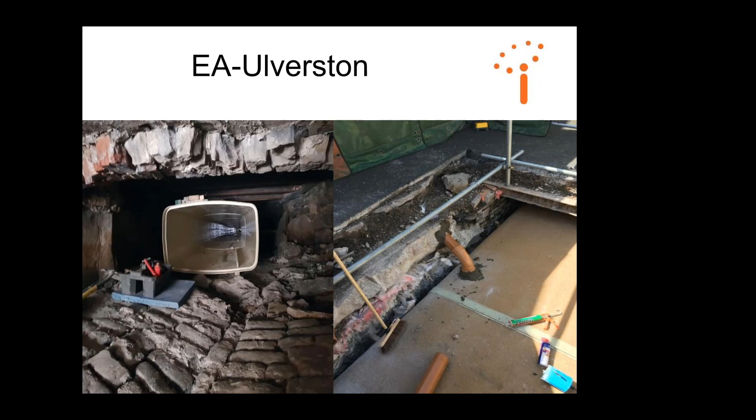Again, these are just some pictures of Ulverston, the EA job. We did some big screens up there under the village where we used preformed GRPs on that section. So again, finished article - piecing in, you can see the terrible state of the existing structure - and then there's a bit about finishing off, where we joined the units.

The reason I think this is in here is because of the mammal shelf. We built a mammal shelf into the GRP for our little furry friends, and again, that's the same job. There's two questions people can ask about this. One, where's the type 1? Looks like type 1 in, back in. That again is for the bug's life, for the ecologist.

Why is there so much grout over the top of it? Why didn't we make it bigger? Well, because these are so smooth, there was a concern about flooding downstream, and the EA were very insistent that we only want it this big because we don't want too much water downstream. Hence why we've got quite a lot of grout over the top, which isn't something I'd like to see, to be honest with you.

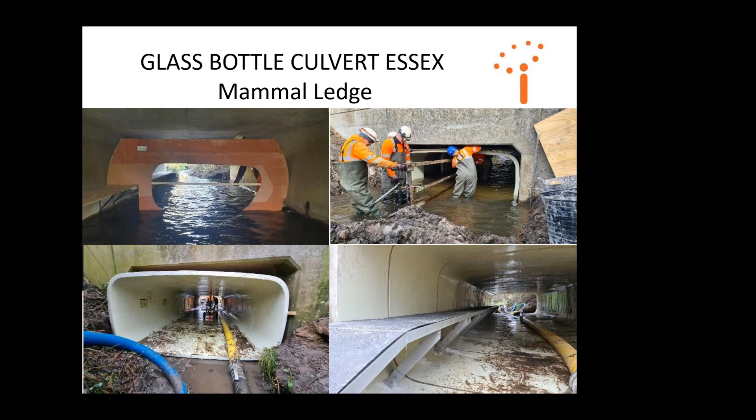Essex, we actually put a mammal shelf in this. We put it in retrospectively because if we'd taken that much out by doing it as a GRP like the previous one, we'd have lost too much capacity in the actual structure. We needed to get as much capacity through there as possible when we were starting to reduce it, and that was one of the restrictions.

And again, Leicestershire, we've now put bat boxes in to look after those people, keep them happy. But again, we can do vertical shafts. This is a job for Welsh Water we did last year, a reservoir I think, where we built them up about 2.4 diameter, strengthened the shaft because it was slightly moving, and there was increased load and water pressure. We built this up for those guys.

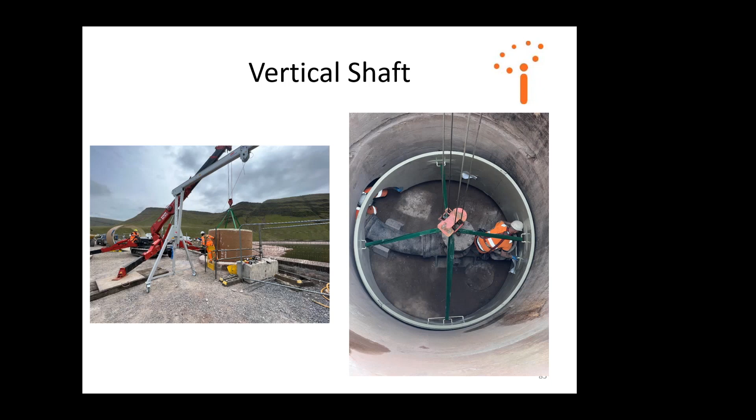So in a way, it's just another tool to look at a job and say, well, actually it should be UV lining, but actually it might be better doing it with GRP. We just look at different options. I stress all the time, it's all about coming to have a look at it, see if it's right. Doesn't cost anything, we don't wear it, we'd rather come and see it. So things like the sort of people we work for, like yourselves, anybody with a culvert really, or anybody with a pipe and things like that.

And I think that is it, to be honest with you. So if you've got any questions, fire away. If you don't, brilliant, you can go. And I've done it just in my time slot, I think.

Just about the UV - what's the minimum diameter you want? If you asked me that 10 years ago, I would say 150. The problem with UV is the curing systems really struggle at 150. They are tight - you can do them, but the pipe has got to be absolutely perfect. If there's a slight step joint in the existing, the light train won't go through. So I'm always reticent to say the smallest I do is 225 with UV.

Over the last few years, they've developed an LED system, what some people call blue light - an LED curing system, and the light train for that is much, much smaller. That's brilliant for 100s, 150s, 225s. So if I was doing something small, I'd go down an LED curing system, very similar to the UV - just a different curing method, similar material. It's not as strong, but it'll give you what you need on a 150 because you don't need a thick wall thickness on a 150, you just haven't got loads on it. So you can go down as small as that nowadays.